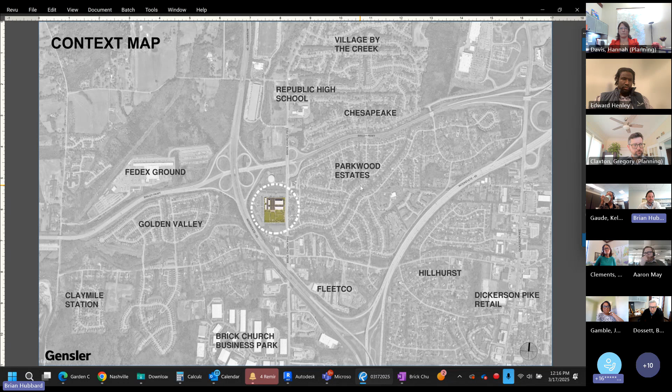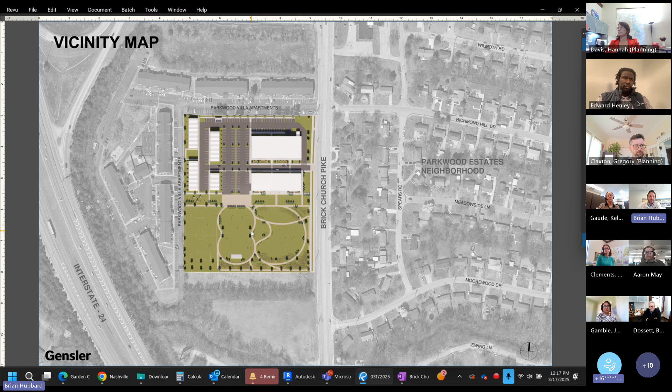As we dive into the site, you really see a split of the site. As some of you know, the southern area of this site is a floodplain, so that's why there's no buildings there, but we'll talk about a few ideas about how we make this more of a community impact type space, really activate it, make it something enjoyable outside of just being at a building, also a community asset for a more active lifestyle, giving you a variety of spaces to be in versus just being inside a given building.

The layout, as we see here, we've got Brick Church on the right, Parkwood Villa Apartments on the north and also on the west. We're proposing, coming in off of Brick Church, this building one, the community center, OHS, having a variety of uses, everything from the county clerk to incubator type kitchen, flexible type space that would benefit both the community and the community center itself.

Moving over into residential, this would be the for-sale product, townhome type elements. This parking is separated at this point in terms of just count, dedicated residential parking. And then moving over into the library, a 20,000 square foot, just general box at this point in time until we really get into the programmatic elements and designing each building in particular.

Designing this again for a flexible parking, knowing that different uses will be used at different times, but also having enough parking spaces for everyone to be able to enjoy the space as needed and not always be hunting for things.

When we look at the county clerk, we think of people coming through this drive, going around and queuing on the backside, keeping a lot of the queuing out of the general pathway of the site. This helps everything move and flow so that those coming to the community center or the library aren't inundated with maybe a queue line of 5 or 6 cars blocking their way.

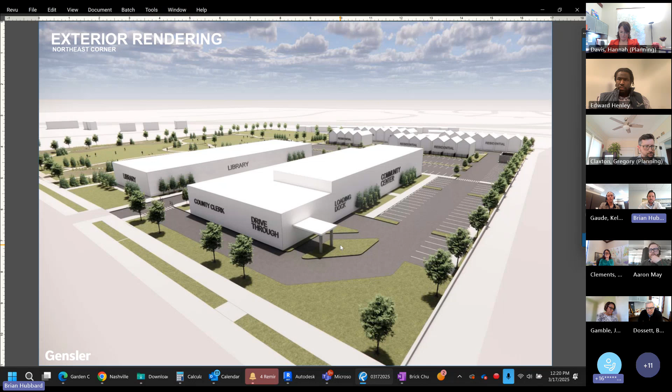Some overall views from the site. This is the northeast corner. You've got Brick Church Pike down here on the left-hand side. Coming in off of Brick Church and entering the site, you'd have the drive-through county clerk, then you'd have the loading dock, community center, and library.

You start to see where we're trying to make this floodplain or green space more of an activated use, something that allows people to really feed down and filter into the green space, becoming a massive community element that we think would be a really major benefit to both this development and the surrounding area.

This is that street that I started to mention earlier on. We think that this is a space, from a day-to-day perspective, there's cars rolling through here, pickups, drop-offs, maybe some street parking as well out front for more ease of use getting into the library, maybe some timed parking, allowing those that need to be close to the front door to be there.

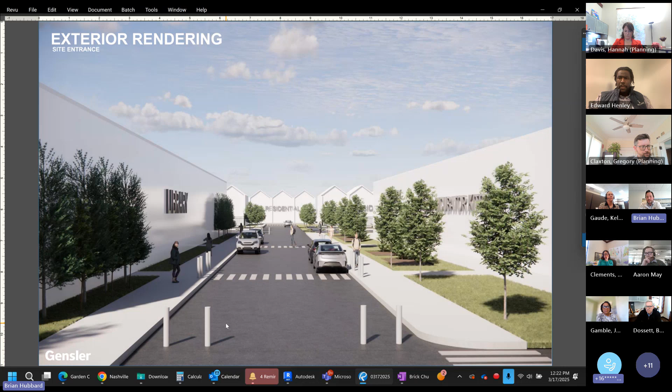But in times of maybe more of a festival use, we think that this is an area that could be fun to shut down from a bollards perspective, make this more of a festival type street, bring in food trucks and really create a community area here where people are not inundated with parking or cars driving by, but really thinking about how the library, the incubator, and the OHS could really celebrate this space. We think that as we evolve, it becomes another community asset and a multi-use of this site.

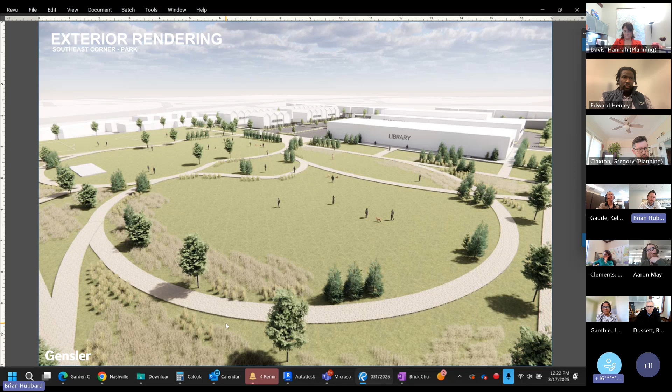Back into the green space on the south side of the site, we think there's a really great idea of having community trails, trying to create more of an active space for people to enjoy, but then also a way to create a lawn for maybe more of a performance space.

We know that there's a natural slope to the site, so being able to get maybe a temporary stage at times, or maybe it's a berm, to create an active use down the south edge and then have everything tier down to that space.

I think there's opportunity for a play field, whether that's a soccer field or any sort of outdoor sporting activities in this area, reserving that, keeping it open for what has already existed there in terms of a soccer field, but also having something a little more manicured than what is existing today.

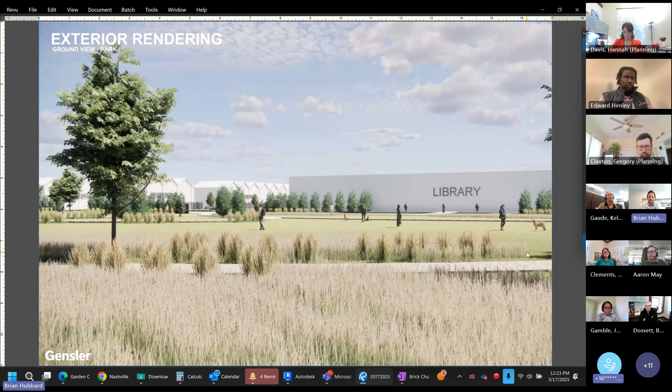A couple more exterior renderings, just a view of being along the pathway, out in the park, on the ball field. One of the things we know is going to be important is that there's an active use on site from the cold weather shelter.

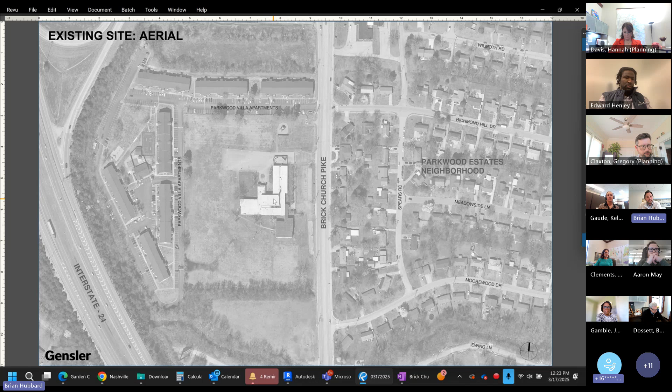So as we start to think about phasing of this opportunity, the buildings have been placed pretty specifically to the site. This is the actual site plan evaluation of what's there. This next diagram shows the phasing of what we're proposing.

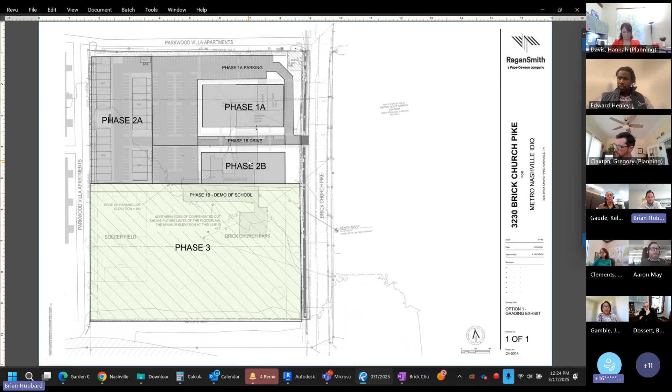And then 2B would be the expansion of the parking in this area, and then the library itself. Then after we get into phase 3, we think that's where we have the opportunity to improve the green space and create more of a community asset, a third space for everybody to enjoy.

All the phases in total.

Here we're just talking about some precedent images. We know floodplains have the opportunity to be beautiful. They don't just have to be green. We think there can be a good use.

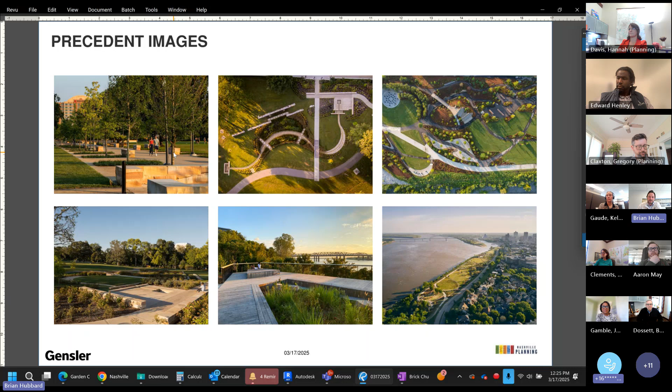So some other spaces around local areas and also in different states and counties, that's how they leverage their floodplain, and how they leverage that as a community element, while still allowing it to do its active use, which is to direct water and allow water to percolate as we get heavy rains.

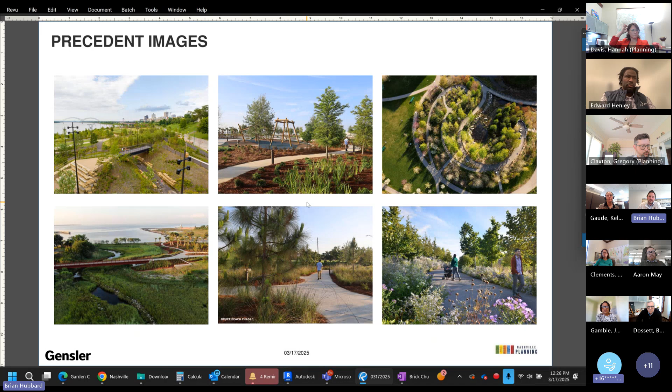So everything from small play areas to more gardens, maybe not necessarily planted gardens, but more of a lush green space and active uses there.

When we start to think about the building itself and how the landscape really integrates with the buildings, we want to create that cross section where there's not necessarily a start and a stop, but something that really blends from the library.

We think there's opportunities to have a deck or an outdoor area that, as you're coming outside of the library, lets you overlook the green space and have a relaxing element. That element of green space and water being able to play together would be really relaxing.

Again, just more executions of what we think around the landscape, but also from a residential perspective. Having that front stoop, having that front door, a little more character to the front areas of the townhomes and back of the areas would provide more of a residential feel and more of a home feel, rather than just a building and a parking lot.

Also, with our buses coming in, I wanted to make sure there will be enough room when we drop them off, enough room for them to come in from Brick Church and circle around to drop people off so they'll have room to get out.

Yes, we think the drop off for the buses would be on the backside here, so they'd be able to pull the buses around and fully go around the site.

And also, is there a timeline for phase 1A and B, as far as when we think this is going to start happening?

Let me field that one. We don't have a timeline yet. A couple things structure the timeline. We'll prepare a final report and provide that to council and the administration. We're working to get things that would help implement this into the capital improvements budget, so that when there's a decision to fund, there's a request in there that can be used.

Right now, our understanding—and Jenna, jump in and correct me if I'm wrong—is that the library has two top priorities for next construction steps: one is Hadley Park, a replacement branch, and the other is a replacement for Richland Park.

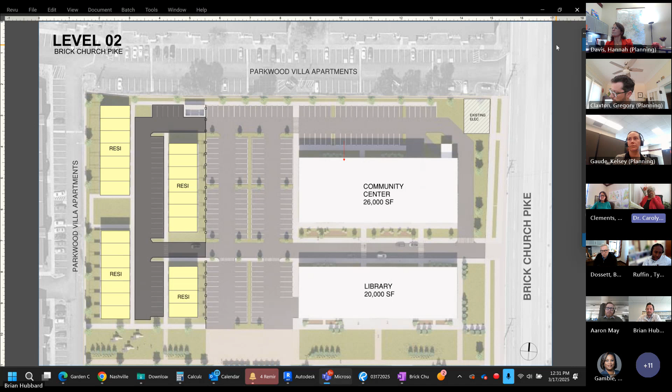Thank you. I have several questions, but I'll start with this since someone else may have these too. As I listened, I heard the following: the county clerk, the incubator kitchen, the community center, the library, townhomes, shelter—I don't know if I missed something.

My question is, at this point, will we be able to have that provided to us, like what we had before, so we can look at the drawings ourselves? It looks like we've got a combination of what we received earlier mixed with 1, 2, and 3, and I'd like to see it as a total, so I can see the fullness of what's being presented and understand the format of the design features.

It would be good to have what you sent us before. I don't know if that was a schematic design or just what you were proposing, but something that will let us see what you've just shown us here. Is there a way we could get something of that nature?

Yeah, we'd be happy to send all of the materials today, after the meeting.

Okay, great, because what I have from before isn't compatible enough for me to understand the fullness of where we are, since there are parts of each in different places. So that's one thing, and I'll hold the other, but I do have a second question I'd like to ask now.

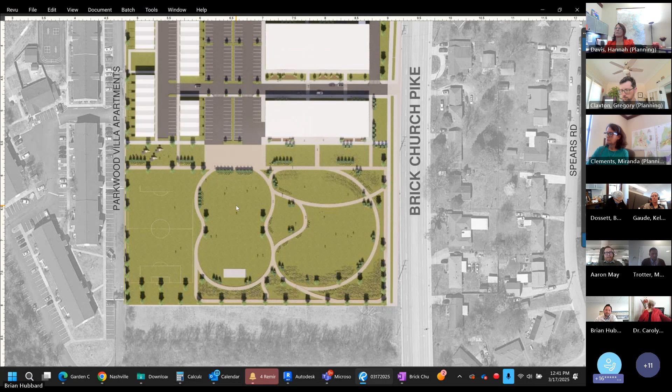Okay, all right. And then if you could go back to the renderings as well—for the library, I know it was discussed at one point that the library could be 2 stories, as we were talking about parking space. Was it taken out just because of elevation, or how it looks, that the buildings could not be 2 stories and consider a parking space underneath?

I think at this time we can definitely dive into providing parking space underneath the library, but we're trying to keep everything very buildable, constructible, not creating a podium element that the library would have to sit on top of. Being a 1-story library also removes the need for any kind of elevators, which was a critical element, making it very accessible given the grades on the site. But everything parks as it is today, with the number of parking spaces along the backside over in this area. So we feel like it didn't need that kind of solution, but as we develop the library, that might be another alternative.

There's no— I mean, we definitely could, depending on the heights needed, make it a 40-foot tall, 2-story library with 20-foot levels, and condense it to create more parking on the backside. So there's a lot of iterations. This was just one of the basic ones that kind of won out.

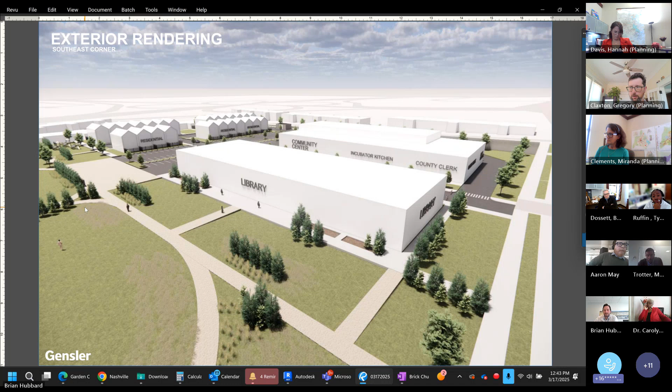I'm sorry, I'm getting over a sickness this weekend, I apologize. We do anticipate...

I don't think it's shown in the renderings, but we do anticipate those being gated entrances.

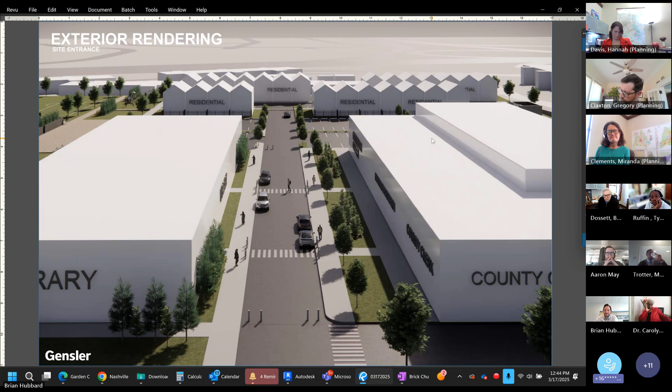My third question is also about the OHS needs, and again this goes into the 2-story portion. I know there was a top level, like when we have the community center—am I understanding that top level is an additional space? Is that 2-story? No, it was just a double height.

Given how long the OHS operates, we thought that as a good community asset, it could be indoor courts of some sort—something multifunctional. So outside of the normal operation time of the OHS, the community could come in and use it, whether it be pickleball, basketball, volleyball, something of that nature. Just having a multi-use with that height.

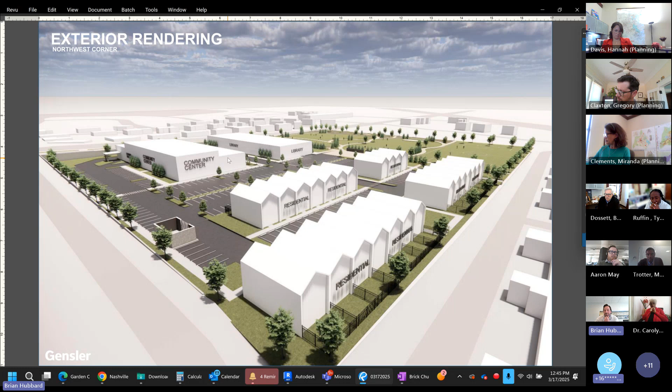But to your point on event space, there's definitely opportunity to create double height space or 2 levels at the front. One thing we talked about is creating something where offices could be on the 2nd floor, having more overview of the lower level—creating more of a perch, more passive oversight of those inside. So the full 17,000 square feet could be dedicated to people and community uses, whether that be showers or food, and all the offices would actually be up, separating those operating it on a daily basis.

Okay, that's great. I know we went to Hadley Park—I missed that—but Coleman Park also has a setup that I believe could be beneficial for OHS as well as the community during those seasons where the community center does need to be used, so that it's not completely cut off to the community. Their layout does have space there with some modifications.

It could actually be enough space to serve and also still have, with the 2-story—there's a track up top—but there could be other renderings. With the 2-story I believe there is that community component where the community would still love to use the space, even though OHS is here. So meeting those needs of the capacity, because I know it was an emergency shelter and it was not able to stay open for various reasons. We want to make sure that when we set it up, it meets the needs for the demand in this area, and at the same time also meets the needs for those who would like to come during the day and still use that as an outlet.

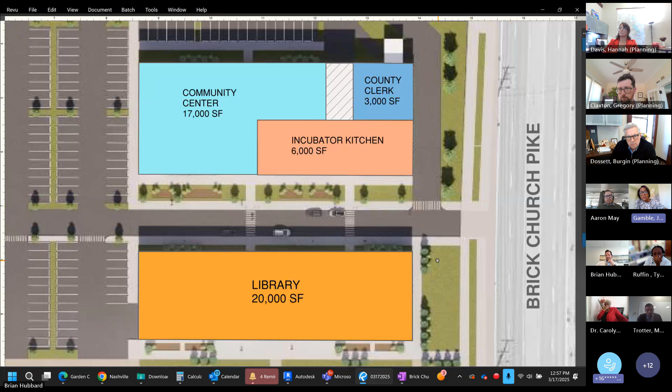But not putting all of the parking there, because even with the library, if you have the parking in the back of the library, what about people who are going to walk? We do have sidewalks, so we need to make it conducive for multimodal use - not only people who are driving, but people who are walking, and then the buses that would need to turn around dropping off at the community center.

I see where you have this circle going around there, which I guess would be fine for that, but then having another two-way ingress - yeah, it's all two-way, it's not just a single one-way. Yeah, I get that.

Here are the sidewalks that would also be accessible by bike, walking, and all sorts. Placing the entry into the library will be critical, but we didn't think that if we had an activity going on here, that would shut down sidewalks and prevent access to the building in multiple areas.

So we did look at bringing a roadway to the south, but this gets into the floodplain. Unfortunately, this area here is where the start of the floodplain is, and we've talked with Metro Water about having a roadway, even if it was fully permeable. They've been against that so far, and in order to not just make a pavement ring around the library, we really wanted to have a space that if you're using the library, you had a way to get to the green space with more activation, control, and connection to that green space.

We also see from a traffic standpoint, or car loading standpoint, one exit for over 600 cars - there's only 230 parking spaces in here.

So from a parking load and a car load, we think that one ingress/egress would work fairly well, especially given that if you did shut this down, you have a relief valve to the north. We don't think this is shut down all the time, just maybe once or twice a month at certain areas. So that gets into programming, how we manage it, and further design of the singular buildings to make it work. This will definitely evolve as it gets further into development. But definitely, I appreciate all the feedback.

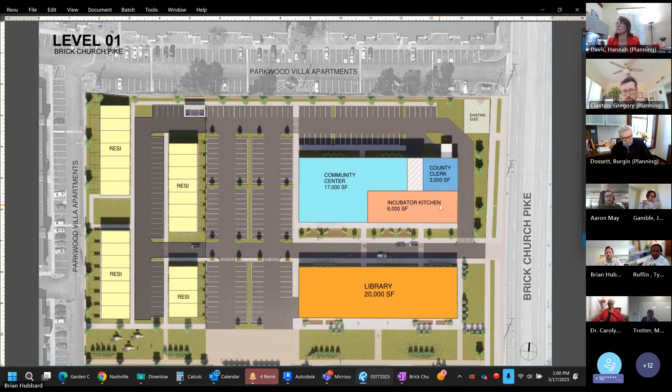If the library is only one level, and we are talking about the homeless population coming over into the library, that would be a concern, because I've had several instances where there was not enough security in the downtown library for us to even provide safe bathrooms for our children to go into.

And so we've always had to resort to going to the children's area. If the library did have a second story where there could be a dedicated space specifically for children, I think the renderings would be a little bit more complete and closer to serving the entire needs of the community. Because we really want to look at the growing family population and how it's going to be served.

Our youth really need a lot of support in this community. And if we're going to include educational programming and incubator services, and continued support specifically for our younger population and our families, then considering the multi-use of the community center beyond OHS, and even beyond the aging population to our youth, is going to really be essential.

So I echo what Councilwoman Gamble said, in terms of we're going to look at this again, because the population is going to change, the needs are going to change, and especially if we're talking about residential in the very back, then who are we going to attract? More than likely, younger families. So we want to make sure this is a safe space for everyone, considering that second story for the library and even for the community center to block off some space and provide some of those safer spaces. Just based on my experience, I know that's going to be a huge concern.